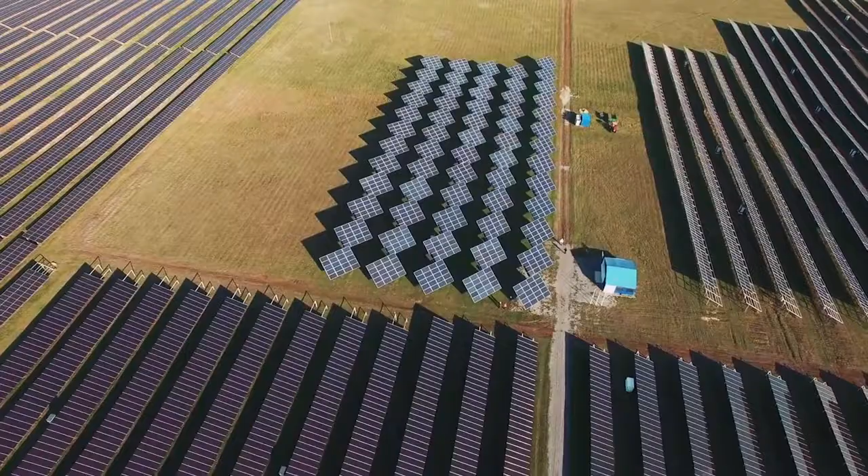An average person's access to technology increases every year, maybe even every day. So does their use of energy. People around the world are driven to find faster, more efficient, and cleaner ways to utilize energy so that it can be accessed sustainably on an even greater scale. Some are doing it with solar power. Others are revolutionizing automobiles. Engineers at NASA are working on a better airplane.

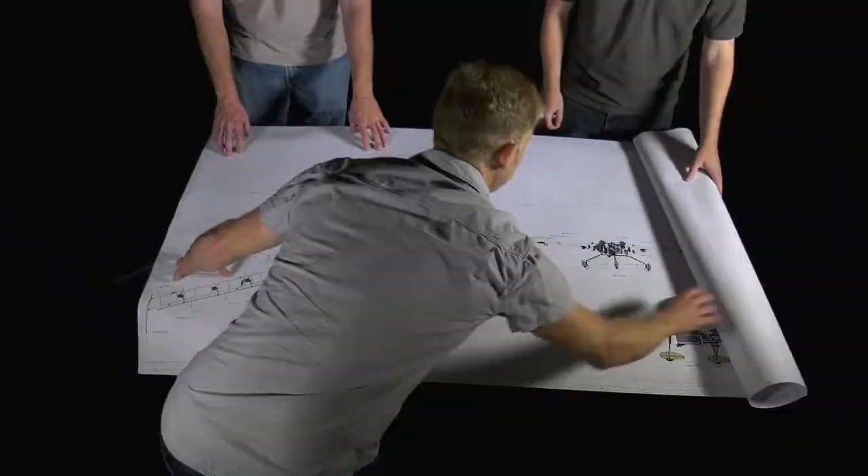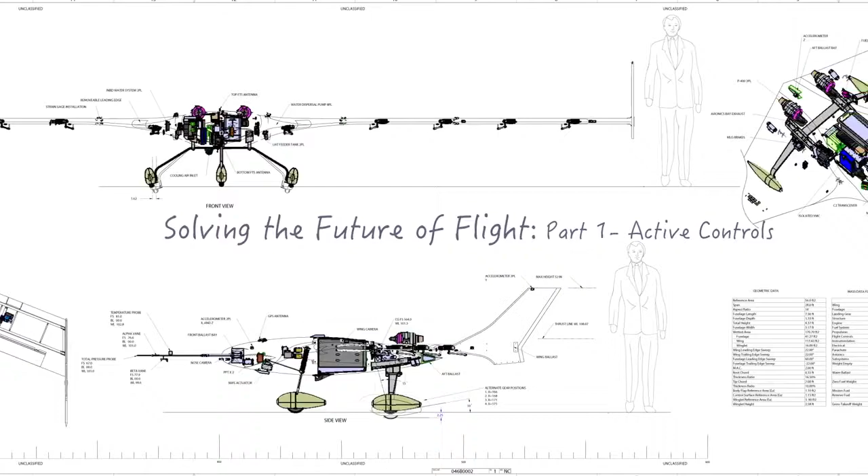We're looking at ways for more efficient travel. One way to do this is with ultra-efficient lift wings that are built with new and lighter material. However, this type of wings could have an issue with flutter. Flutter is a type of unstable interaction between a structure and the air that is moving around it.

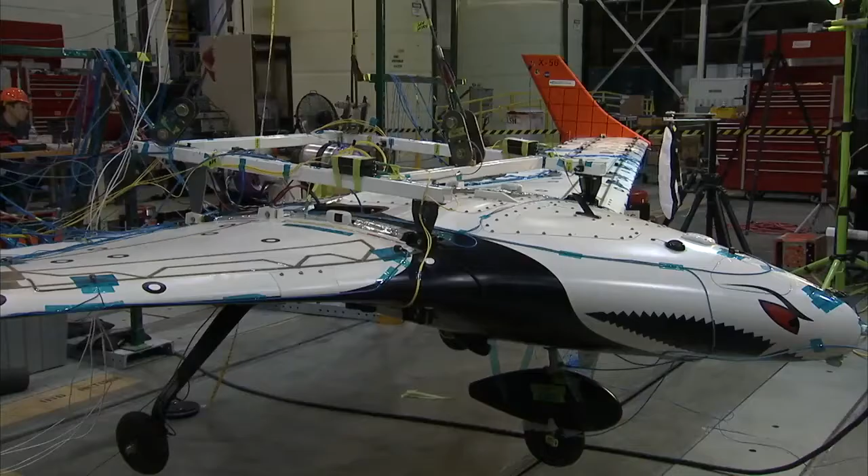All structures vibrate at their own fundamental frequencies with their own harmonics. Simple structures, like guitar strings, have relatively simple harmonics, which allow for the production of a clean, clear musical note. More complex structures have more complex harmonics, but they still vibrate according to the same laws of physics.

The air around these objects is a fluid, and even though you can't see it, it exerts a force on everything moving through it. Flutter occurs when the forces from the air interact with the structural vibrations in such a way that they grow. Sometimes these unstable interactions can have catastrophic consequences. Even very large structures can be affected by these types of destructive phenomena.

Flutter phenomena in modern transport aircraft is well understood as a result of decades of research. Today's aircraft wings are built to account for flutter by building them relatively rigid. The problem with rigidity is that it makes airplanes heavier and less efficient than they would be with more flexible wings. There's an ever-increasing demand for greater speed, better fuel efficiency, and passenger comfort.

But as we push the limits of what is possible with current technology, we must find ways to achieve these gains without sacrificing the hard-won and impressive safety record of today's aviation industry. One promising technology that may make it possible to improve both aircraft safety and performance is active stabilization of flutter using advanced flight control systems. Current aircraft use passive means to avoid flutter. They carry around extra structure and limit operational speeds, basically avoiding the conditions where flutter occurs.

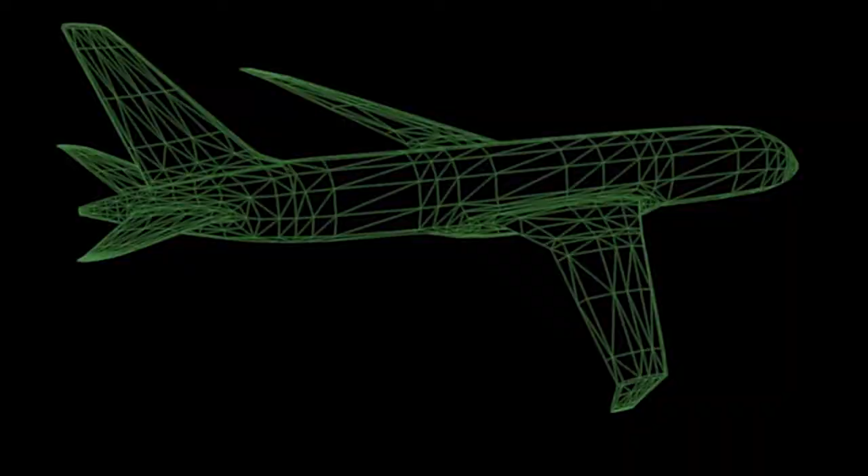Consider this wine glass. The structure of the wine glass resonates or vibrates at a characteristic frequency. If we excite those frequencies with enough energy, the structure of the wine glass will break. Now think about the airplane structure like the wine glass. It vibrates at a few characteristic frequencies, and if we fly fast enough, like turning up the volume, and we're exciting those wing frequencies, the wing can break similar to the wine glass. By building the wings stiff and flying slower, we prevent the wings from being destroyed by flutter.

However, as we try to fly faster with lighter weight, more flexible wings, we can no longer just avoid flutter. We have to improve our prediction and analysis tools and come up with clever, innovative solutions to the flutter problem. One promising solution to the problems we encounter with flutter as wings become lighter weight and we fly faster is to take an active role in suppressing those structural vibrations with the control system. We can utilize advanced sensors, software, actuators, and computers to sense the wing vibrations and proactively manage flutter.

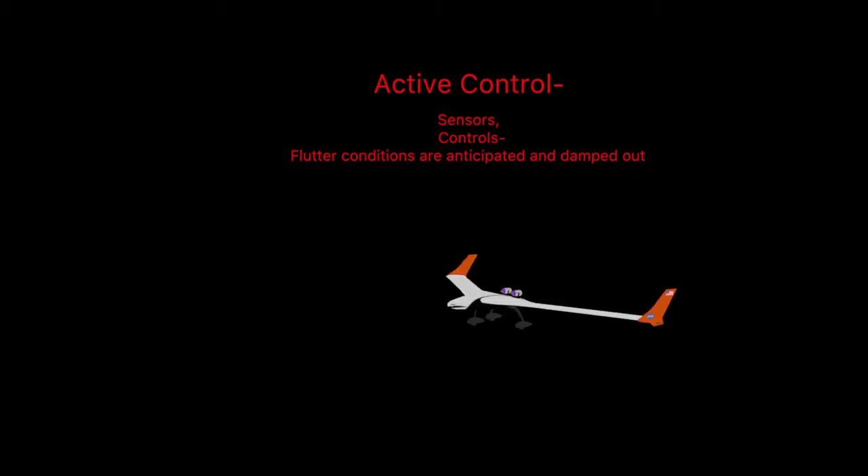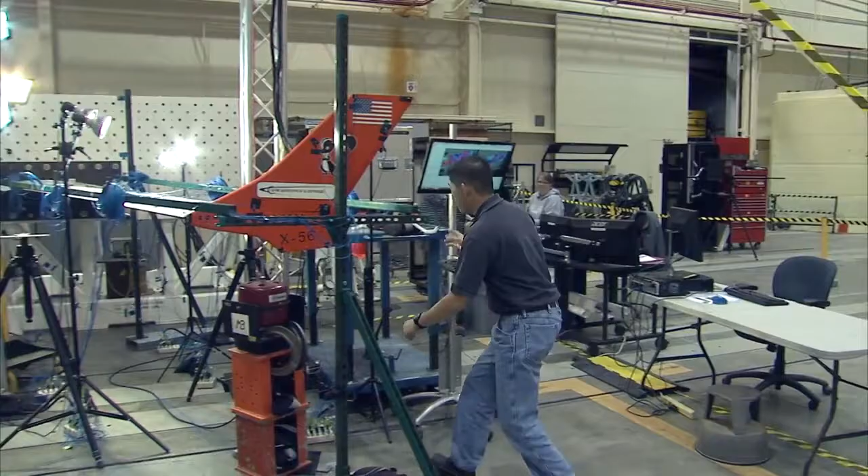This is what we're trying to accomplish with X-56. We're preparing to flight test control systems that actively suppress flutter and investigating advanced sensors, such as these fiber optic strain sensors, that may give us a more detailed picture of the motion within the aircraft structure. But to actively control something, you have to understand how it works. We are developing more detailed and accurate math and physics models of aircraft and validating those models with as much test data as we can get our hands on.

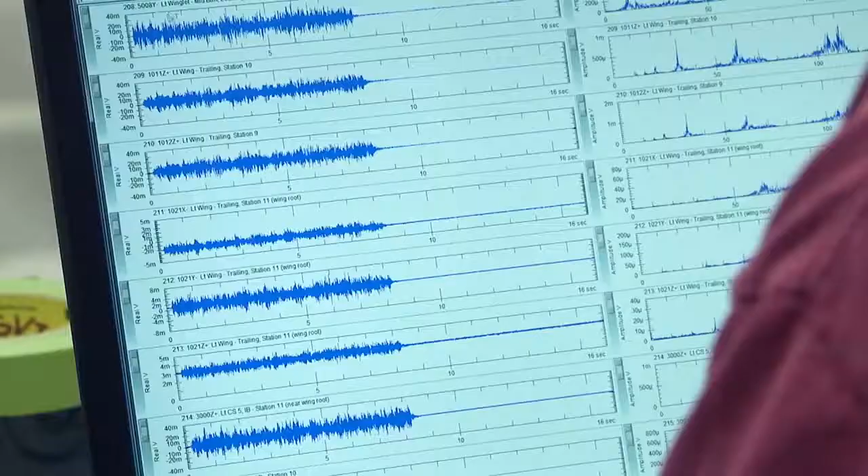It is essential that we understand exactly how our aircraft moves, how loads affect wing bending, how forces and moments from various sources affect aircraft motion, and at what frequencies the X-56 structure vibrates. By answering these questions, the team can model how the X-56 will behave in flight. We can make predictions about flutter-induced instability, and we can create controls to respond to these dynamics. And by predicting how the aircraft will behave in flight and how it may flutter, the team can begin to develop accurate control strategies and software.

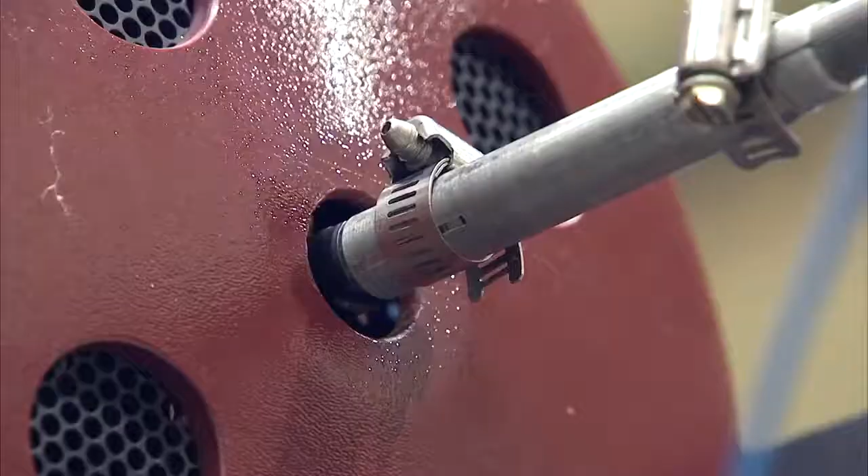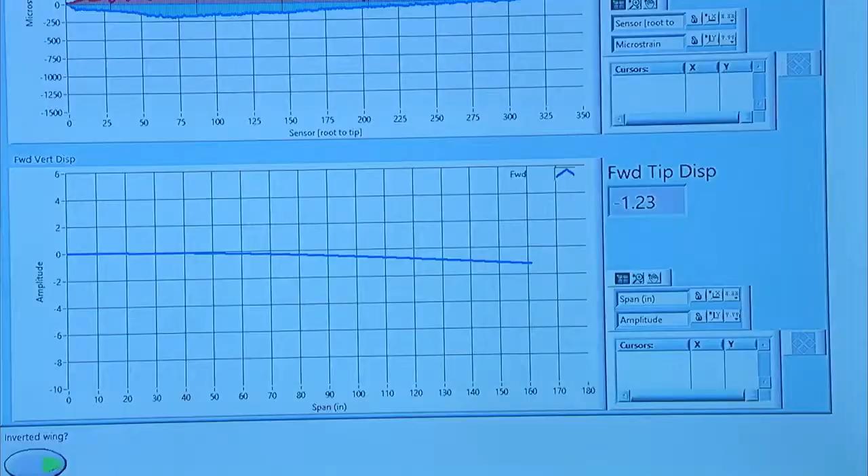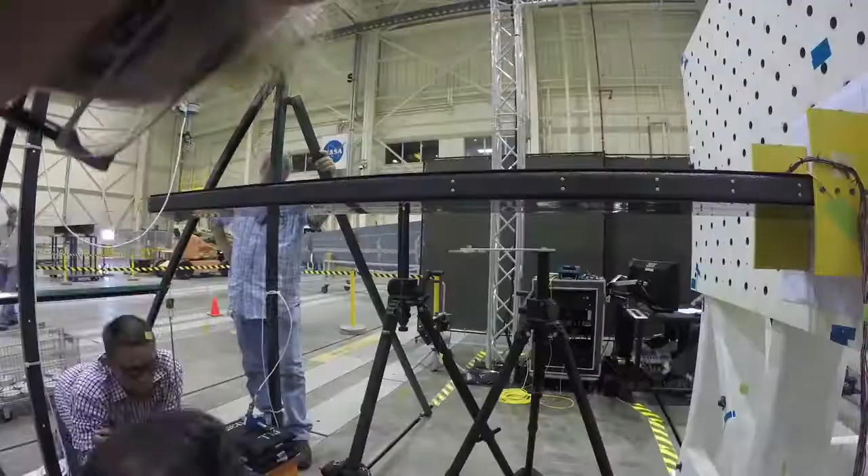Once the control software is written and the airplane is once again ready to fly, flight tests will attempt to purposefully put X-56 into flutter conditions to investigate the performance of the active control system. Can these control systems actively suppress flutter? But before that, there is still much to be done. The active controls must be tested on the ground, the control room must be prepared, and the communication equipment tested and validated. And active controls are not the only way to suppress flutter. NASA engineers and their partners are working on a multitude of methods to deal with it, with the hopes of coming to one integrated solution for the future of flight.